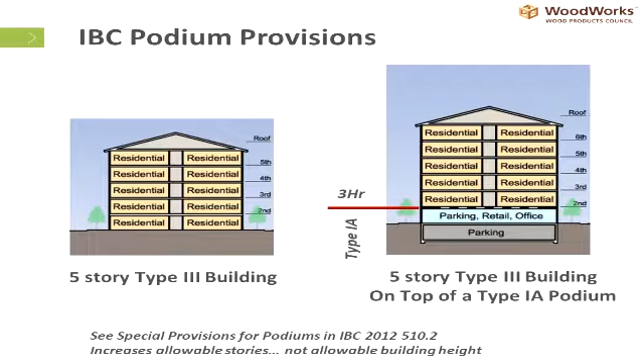Let me, we'll keep on rolling here, because I know we gotta keep everything on time, but keep on asking questions when you got them, we're doing good.

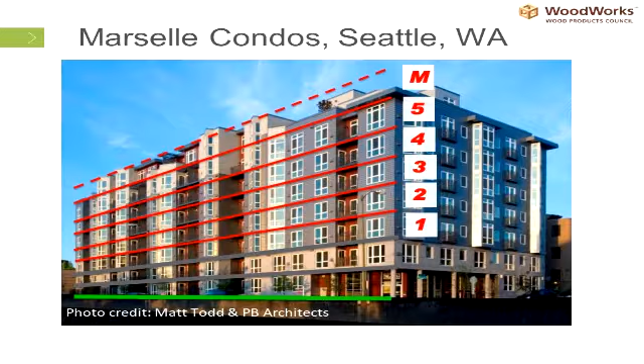As far as different construction techniques, we're looking at post and beam, kind of your traditional warehouse construction, those types of things. Light frame construction, what most of you are familiar with, and this mass timber. And we'll get into that and show some pictures. So I find it really interesting what's possible with wood.

Actually, I remember doing a presentation up in New York City, and I'd never done one there before. And I ask the design community out there, do you think a wood frame building will last 100 years? And they all look at me, and they go, we've got 12-story wood frame buildings throughout the city, and they're all over 100 years old. So when you think about what's possible, we're really just trying to figure out what they were doing 100, 120 years ago and recapture that.

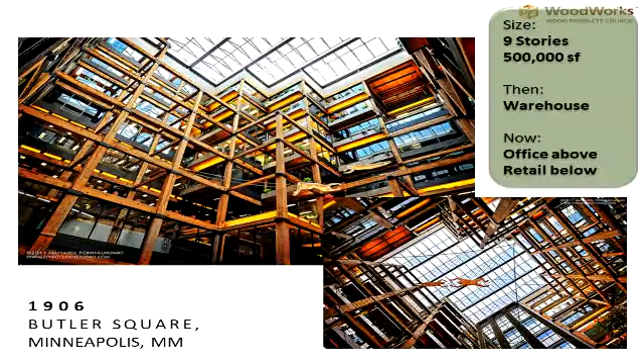This is an example of this. This building was constructed in 1906. It's in Minneapolis, Minnesota. So there's the modern day photo of it. It was originally a warehouse, 9 stories, 500,000 square feet. It's an office with retail, and they took out some of the warehouse, put in a new roof. And so this is what's possible. And we're really just recapturing what happened there.

So if you go back pre-1900, we didn't have the national building codes, those types of things. And actually, in the 1920s, when the codes got put in, they implemented restrictions on wood frame buildings. And a lot of it had to do with, we didn't have sprinkler construction. Imagine that. Things have changed a lot in the last 100 years. So it's like, hey, we're going to limit this just with concerns. But really, we've seen a transformation in what people are looking at.

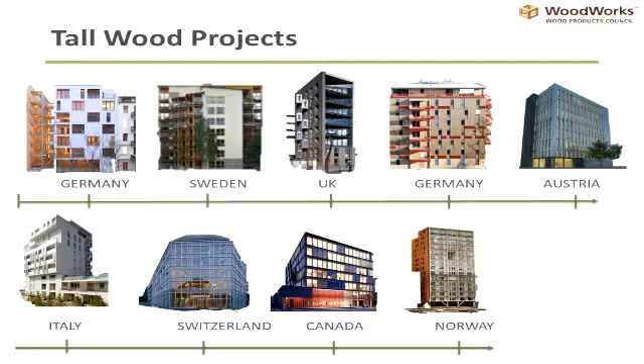So this gives you an idea, if we just step outside the United States, what's going on. These are just different buildings, and they were constructed over really the last 10 years. This is all the different countries that are looking at these tall wood buildings. People are just really getting into tall wood design. So Germany, Sweden, Austria. We got this project up in Canada, and then this is one of the newer ones, a 14-story building in Norway.

And this kind of gives you the overall height of it. What's really crazy is, we got 163 feet. Some of the tallest wood structures in the world are pagodas in China that were built over 1,000 years ago. All wood construction, wood dowels, all put together, pretty cool stuff.

This is an idea of what we've got going on. So this is the Forte building in Australia. I mentioned Lend-Lease a little bit ago, so this was one of their projects. Poor soils required a much lighter structure. They completed this in 2012. 10 stories, 9 stories of it are wood, in Melbourne, Australia. And like I said, they are really grabbing hold of this and just seeing what's possible with it.

You talked about carbon sequestration. So this is an example. There's a couple things that go on when you build out of wood. First of all is the carbon that's sequestered. This is the Stadthaus building in the UK, and it's kind of a cool project. When I started with WoodWorks, we brought him over from England to be a presenter for us. First of all, they built this structure in 27 days. I guess the construction crew works like 3 days a week, so it took a little longer, but when you figure out how many days they're working, it's 27 days.

They showed there was virtually no waste on this project. I think it was basically one broom and one little shovel full, and it was just where they drilled holes for electrical. So you've got this carbon sequestered, basically 50% of your wood. If I've got a 2x4 8 foot long, 4 foot of it has sequestered carbon in it. The rest is other things, water, etc.

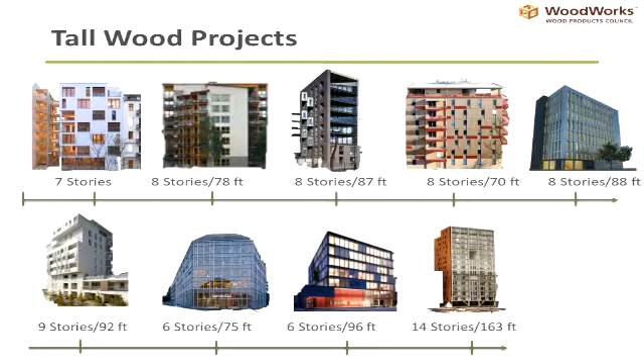This is another one, Treet Apartments. Gives you an idea. So that's the 14-story building in Norway. We'll probably skip the video. I got the video. We'll skip that one. It's okay. We'll jump to some of these other things.

So why are people doing this? Efficiency and speed, construction site constraints. One of them is this aesthetic. They just love the look of it. That's one of the really key drivers. We're seeing a lot of this in office buildings and other building types, buildings that historically they haven't done out of wood.

Yes, sir. How does the strength of this cross-laminated timber compare with just regular wood? Well, it's the same materials. We just got a lot more of it. So to keep it at a very simple level, I can build a floor in my house with 2x8s at 16 inches on center, or I can put 2x8s at 1.5 inches on center. So in that regard, I've got 8 to 10 times the strength, just because it is a solid, massive product at that point.

Yes, sir. How are the architectural schools buying into wood construction these days? I did see some architects that built a home to wood construction. Yeah. No, that's definitely a hurdle that we have. I will say this mass timber, just the excitement it creates, you see a lot of people wanting to look at it again. An example just here recently, student housing at the University of Arkansas has historically been light gauge steel and masonry. And now they're actually looking at doing one of their first student housing projects out of wood. And that's the Dean of Architecture who's driving that. I've got a picture, University of Massachusetts has got a project.

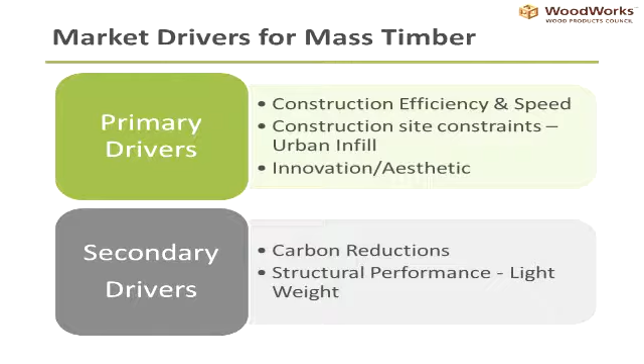And sir, you had a question? Many buildings, possibly including this one, institutional public buildings, are built under LEED certification. Does that present a challenge to you, given what LEED certification means when they get to wood products, or how do you overcome that? Yeah, well, actually, the United States Green Building Council finally relented, and they now recognize SFI certified wood versus just FSC, and so that was a huge step in getting us in the right place.

The other thing about this, what's that? This building is LEED Platinum. Yep. So with LEED Platinum, okay, you're hunting and scratching for every darn point you can get, but if you're doing silver or even gold, we're talking about 1 point. This is the part that kills me: there's a lot of emotion and a lot of fighting over 1 point in the certification program.

Excuse me, you've got a question over here. She's been trying to get my attention, I'm sorry, I missed that one. Thank you. I wanted to say, the new Whitney Museum in New York, that's a multi-story building, they used part of a floor that they'd taken out of another building and processed it and put some padding with it. And it's so much easier on the legs just walking. They're very proud of being able to use this heart pine because they pointed it out to us.

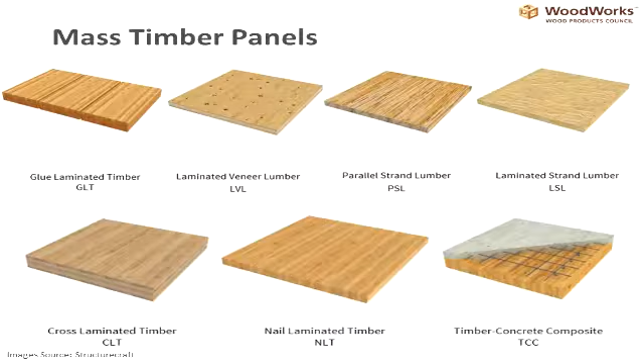Thank you, Scott. Great presentation. Thank you. And that's always one, I always try to keep my mouth shut about what people are doing, because I always get these phone calls like, 1 minute? I know, I'm trying. All right, well, let me find some good stuff here.

So we'll turn through it here. So this is an example. This is nail laminated timber. This is Bullitt Center in Seattle. So this is the cool thing that comes out of this. You can do this today in Alabama. There is not a code restriction. I mean, going tall, there might be some stuff you got to figure out. That'd be going beyond the code. But you can go grab yourself some Southern Yellow Pine at 84 Lumber or whoever and make this thing work right now.

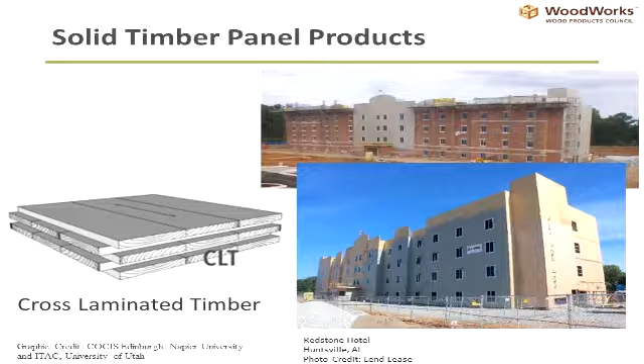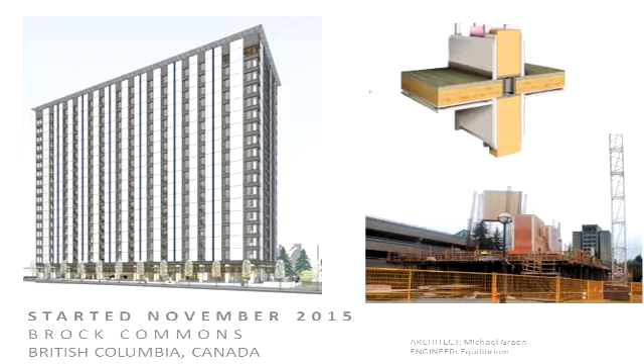Some other products. This is pretty cool. Brock Commons, if you haven't seen it, there's some really nice YouTube videos. An 18-story building on the University of British Columbia campus. So I got some examples. Just really cool how this went together. There's an example where they're laying up the last panel of the project.

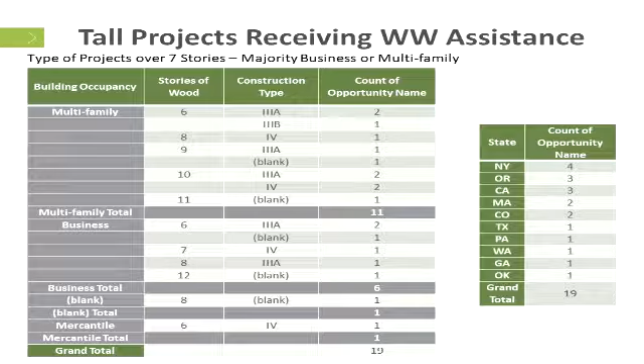And is it coming to America? Yes, this has broken ground. This is a 12-story building in Portland, Oregon that's moving forward. So we're getting there. And actually, behind the scenes at WoodWorks, we're working on 19 projects right now looking at this. But once again, everybody wants to cover that. And we estimate that we're probably adding about 406 million board feet of lumber by these efforts.

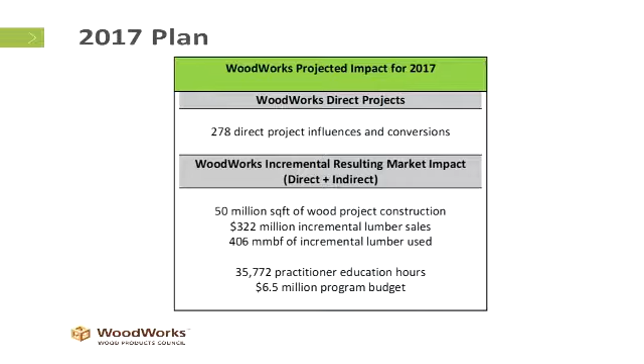So we just got done doing blast testing in Florida, and so that's getting us into military construction.

That's what I got. Thank you, Scott. Yeah.